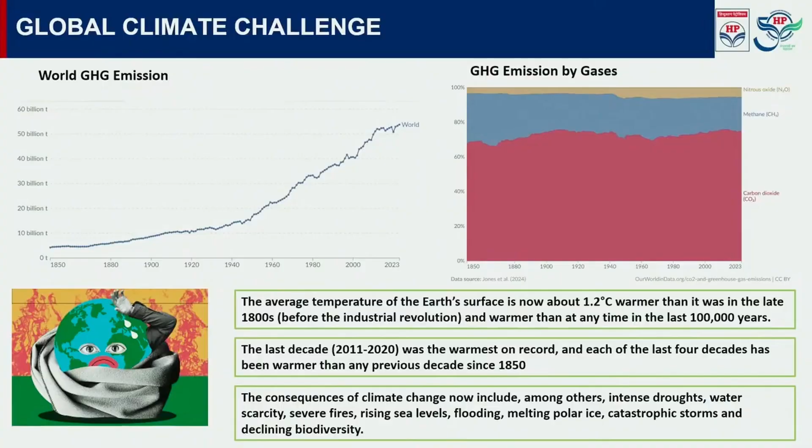The current path is telling us we may reach 4 degrees in the next 3-4 decades, which is going to wipe off the GDP of the world by 30%. And we will be seeing 10 months of drought, and the balance 2 months are going to be floods. This is what we are going to see, and in some parts of the world we are already seeing it. Next slide, please.

Now, apart from the climate change and the gases I told you about, which are going to trap the heat, there are several planetary boundaries which we are supposed to honor. There are 9 such boundaries listed here. One of them is climate change. Apart from climate change, we should also have biosphere integrity, stratospheric ozone depletion, atmospheric aerosol loading, ocean acidification, land system change, freshwater use, and so on and so forth.

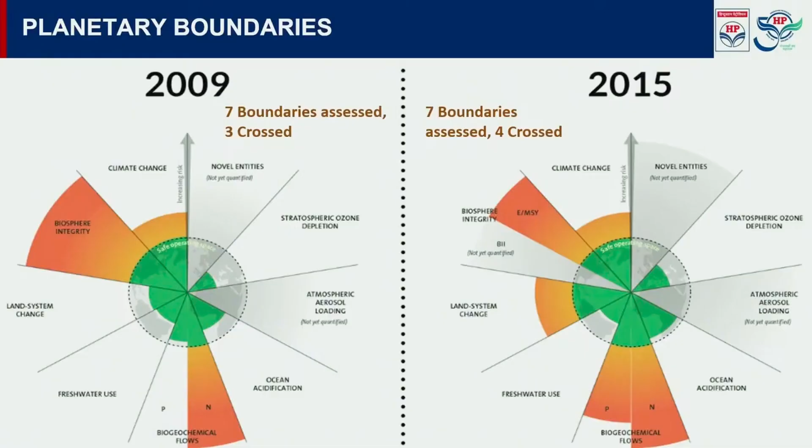In 2009, we had just violated about 3 of them. In 2015, we had violated more than 4. And in 2023, we have now crossed close to 6 boundaries out of 9. The predominant one being climate change, part of which is the CO2 concentration. Now, 1 or 2 I will just explain.

Biosphere integrity is the old species which are disappearing. Many of the plant and animal species, we know, are nearing extinction because of the ecological changes that are taking place. Water, we know, even cities like Mumbai or Delhi, during summer we have challenges of availability of water, which is affecting the entire society, and many others are there. We will not go into all these aspects, but we will see how this climate change is affecting us.

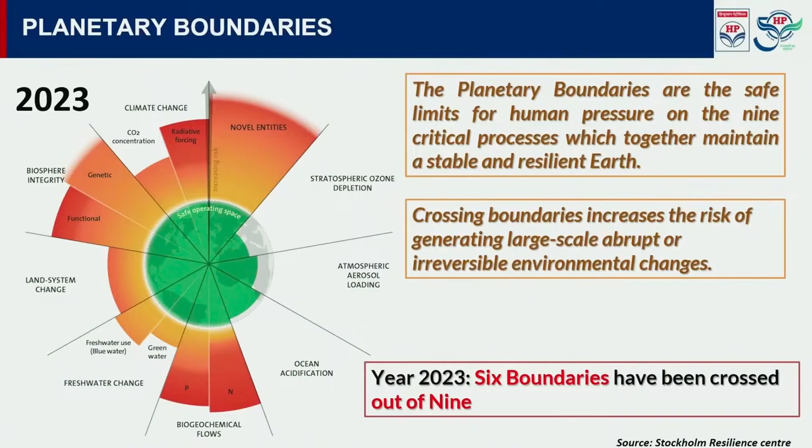The planetary boundaries are the safe limits for human pressure on the 9 critical processes, which are required to be maintained if we are to live as we are living today or as we lived a century back. Next, please.

Now come to the different terminologies or terms we have been seeing. The first is energy dilemma. Energy dilemma is what I will transition to. Should I go for renewable energy? Should I go for nuclear energy? Should we curtail our energy usage? Should we be increasing any other forms or continue with fossil energy and invent means of reducing the pollution? So there are a lot of solutions we think about. But one thing that is clear is we have still not found out exactly what is to be done.

There are many areas which have progressed, but they are not all going to take us to the goals we have. So that is what is called the energy dilemma. We have a dilemma today on what is to be done. But if somebody is going to solve this dilemma for this world, for humanity, there is only one group of people who will be capable of doing it. I will tell that towards the end. Even if I miss, please ask me during the question session. So who are the people who are capable of solving this energy dilemma?

Next comes the term energy trilemma, which is: I cannot completely switch over only to net zero energy, but it should also be affordable. It should be affordable to the weakest parts of society. It should be secure; I should get it throughout the year. If I'm going to import a particular energy and some geopolitical situation happens, then you may not get it throughout the year. So the next aspect is security, and it has to be sustainable. Whatever we do, it should be sustainable. That was the term coined about 5 years back, that energy trilemma is important and not just energy transition.

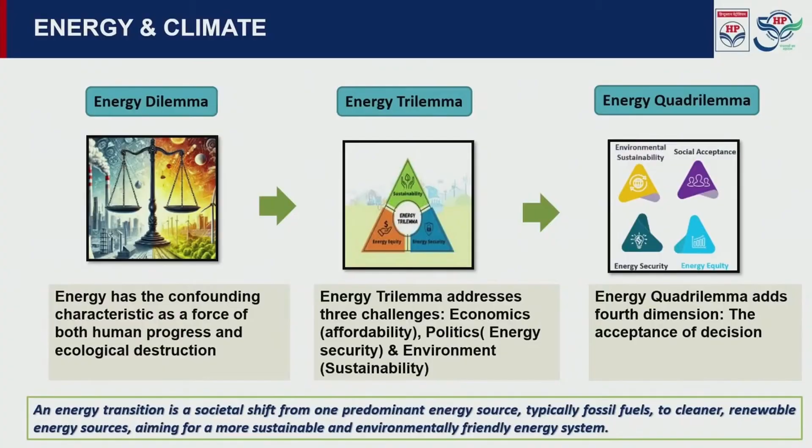So we have a duty. We will have to explain the exact impact of what we are doing, or the benefits of whatever solutions we are doing, then it will be accepted in society. So the quadrilemma takes care of the three dimensions of the energy transition, plus the fourth dimension, social acceptance. These are only some of the terms which many of us keep talking about, but in the coming future, more such dimensions may also get added. Next, please.

Is it possible or not possible? That is the question we will address. Actually, it appears it is possible, though the rate is very, very low. In our own country, if somebody 10, 15 years back had thought about solar energy penetration, they would not have thought that by 2025 we could have achieved this much development. Today, more than 27% of the peak energy is being supplied by solar and wind, which was not thought of about 12 years back. That means this is possible.

Electric vehicles, we have been hearing about them from the early 2000s onwards. In the first decade, it grew very slowly. In the second decade, we thought it would grow very fast, but it didn't happen. But in the current decade, it's really penetrating a lot. In some countries like Norway, new fossil fuel vehicle growth is very, very low. More than 90% of the new vehicles sold are electric. That means in some parts of the world, the transition is already taking place. It will gradually shift to our countries also.

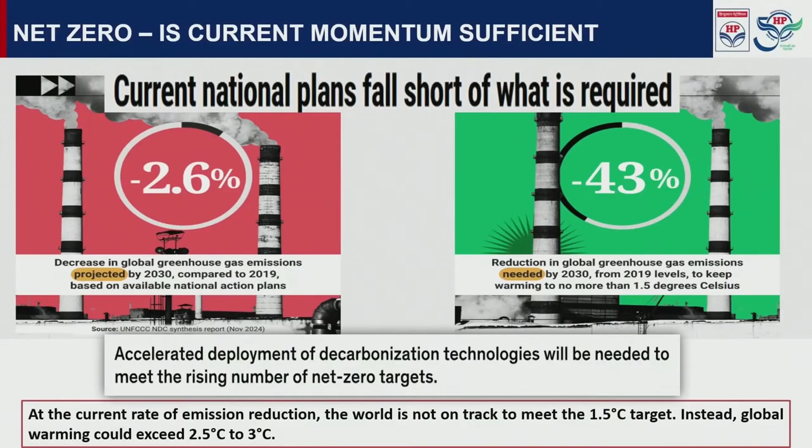Now, if we have to keep the temperature rise at only 1.5 degrees, which was our target to maintain the same climatic conditions in the world, we have achieved only 2.6% of what is supposed to be done. We have reduced CO2 by just 2.6% in the last 5 or 6 years, whereas the requirement is to reduce by 43% by 2030 to restrict the temperature rise. So this is the challenge and reality. At this rate, the temperature rise is definitely going to be more than 3 degrees in the coming 3-4 decades.

Now, what are the key strategies we have identified as an industry? This may not be the only solution, but these are the things we are doing. On some there is very good development and penetration, but in some areas we are not able to do much. The first one is renewable feedstocks and renewable energy, which we have already seen in the previous slides.

India is today blending 20% ethanol in the petrol we use. That means 20% of the fuel we use is already renewable, coming from a biogenic source. Similarly, biodiesel is about 3-4%, biogas less than 1%, but in the coming days this will increase. Even aviation will introduce sustainable aviation fuel, which comes from biosources. So there are some good developments that are reducing our carbon footprint.

The next thing all of us have planned is green hydrogen. Hydrogen is the cleanest molecule you will ever see, because when it burns, it gives only H2O. So it is a no-brainer, and it's been known for centuries. Then why has it not grown as the alternate fuel?

It's not easy to make hydrogen so simple. I mean, you can say in an easy way you will do, but it is not that easy. That's why it has not grown as it otherwise would have. Because even in the 1960s, hydrogen-powered vehicles were already invented and ran in some countries, but it did not grow because of the cost factor.

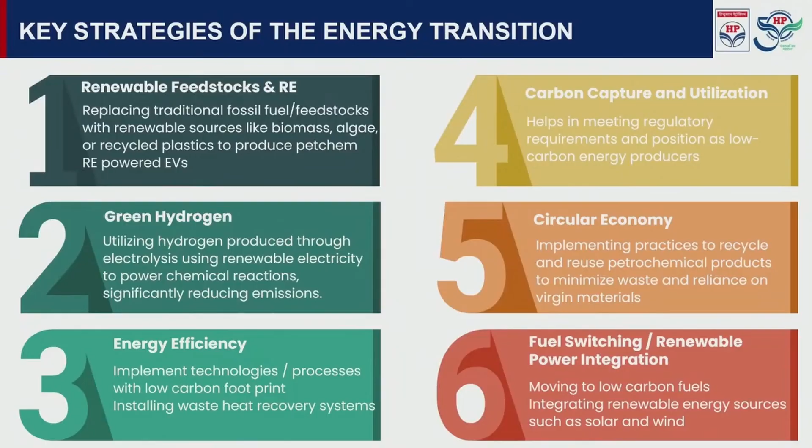Just a small diversion, many of you will know this, you would have read some books or during the initial classes, people would have covered this. One of the fascinating facts of chemical engineering is that today all of us are able to eat food, in spite of India's population multiplying several fold from the day we got independence till today. The population has grown by almost 4 times. But for all 4 times the people, we are able to give them food. So how are we able to give it? Simply because synthetic fertilizers have been used.

The fertilizer industry has actually led the green revolution, and all of us are able to get food without any problem just because of fertilizers. And fertilizers have come because of the Haber-Bosch process, which is the conversion of nitrogen and hydrogen into ammonia, and then we convert it into urea and make all sorts of fertilizers from that. If the crop or whatever agricultural produce is able to do this, it's only because of the chemical engineering process, which is the Haber process.

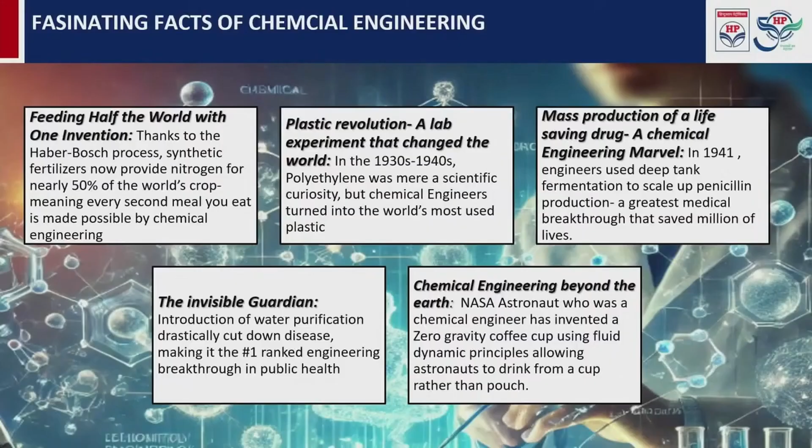Now the next is the plastic revolution. In a lab, normally we do several research; with a number of materials people will keep on identifying, developing. So polyethylene was one such material, identified a century back. But today polyethylene is one of the most important plastic materials, without which the standard of living you have reached would not have come. It is there in each and every part of life today, which has made many materials accessible and affordable, and this again has come from chemical engineers like us.

The next most important is life-saving drugs. Today the life expectancy has gone to more than 70 years from the low 50s several decades before because of the advancements made in the pharmaceutical industry. And in all these pharmaceutical industries, chemical engineers have developed processes, materials, solutions for overcoming many of the pandemics that were existing in our world.

One more important one, like food, is water purification. Water is another key resource for us. And as the population grew, water became scarce. But because of water purification technologies, we are able to give water to the entire society even now. There are problems in pockets, but as more and more breakthroughs come, in a more affordable way, we will be able to give water for all our requirements.

One more invention is about the astronauts. We have heard about the use of pencils in spacecraft. You even have ball pens which will flow in spacecraft, and so on and so forth. All have come through innovative ideas of chemical engineers like us. Next, please. Some of these facts you would have known.

Now, just touching on the history of chemical engineering. Ever since the Bronze Age or the Metal Age started, chemical engineering has been there. We have been purifying, we have been converting into various forms. Then for perfume extraction, chemical engineering principles were used. These are all 3,000, 4,000 years back. Definitely there were no colleges or chemical engineering curriculum at that time.

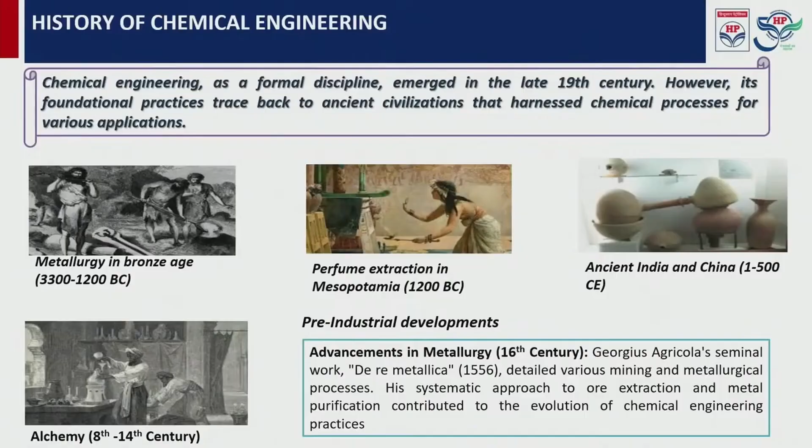And another most notable item which people were always talking about 2,000 years back: many people claimed they would convert lead into gold, which is alchemy. But these were all sincere attempts made to make changes to the molecules. Next, please.

Now, the organized chemical engineering field, the industry we have, how did it come? It started in the UK; most of the developments were taking place in Northern or Western European countries. When the glass industry was growing, there was a need for soda ash. So from batch processes, they went to a 24/7/365 industry. The first such industry was the soda ash industry. Then it moved into the textile industry, where chemical engineers started producing the dyes required for textiles.

A number of other similar processes gained traction towards the end of the 19th century. The first recorded academic progress, a series of lectures at the Manchester Institute of Technology, was documented, and the first curriculum started sometime in 1887. In 1888, the first chemical engineering curriculum at MIT in the US was started. So this is a brief history, and subsequently with the advent of the horseless carriage, the transport vehicles, fuels came into being, which we are all using till today. Next, please.

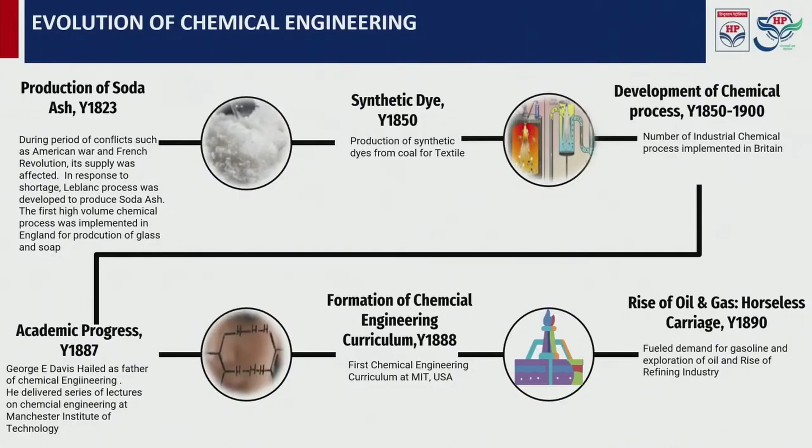Similar information, I have just put it in a different bucket. From 1930 to 1960, when the World War came, there was a requirement for a lot of new materials. Chemical engineers stepped into each and every requirement and solved the problems of World War II. Today we have high octane gasoline; the gasoline we buy from petrol pumps has an octane number of 91. When World War II broke out, there was a requirement of high octane gasoline for running planes, and the country which could make huge quantities of it actually won the war.

So that is the importance of chemical engineering, not only in lab scale development, but in industrial scale production also. The petrochemical industry we have already seen. Advancement in unit operations has actually helped us improve the efficiency of production and bring down the cost of production.

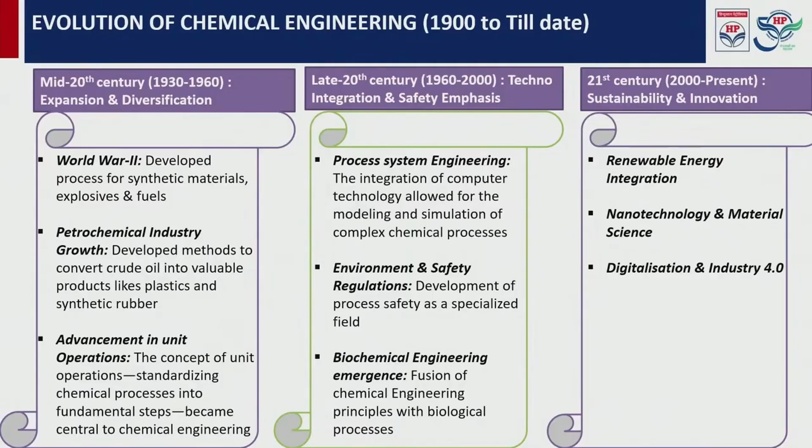From 1960 to 2000, the advent of computers came, so process control came into the picture, and efficiency went even higher and manual intervention reduced. Today, the chemical industry is a place where you will see fewer personnel in the process plants because of the advent of computers and process control.

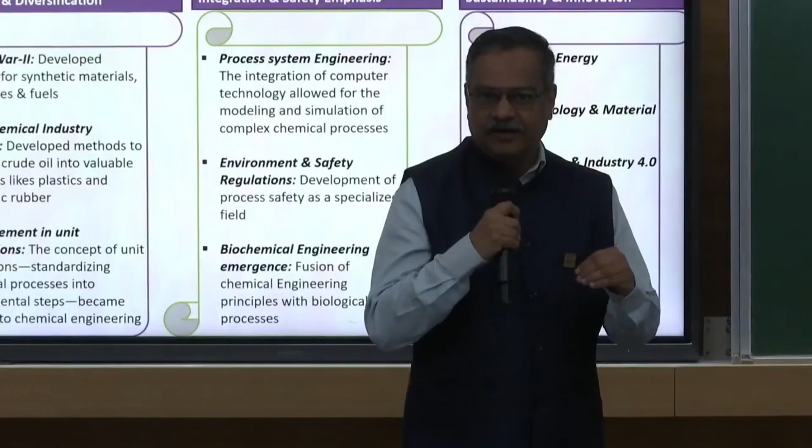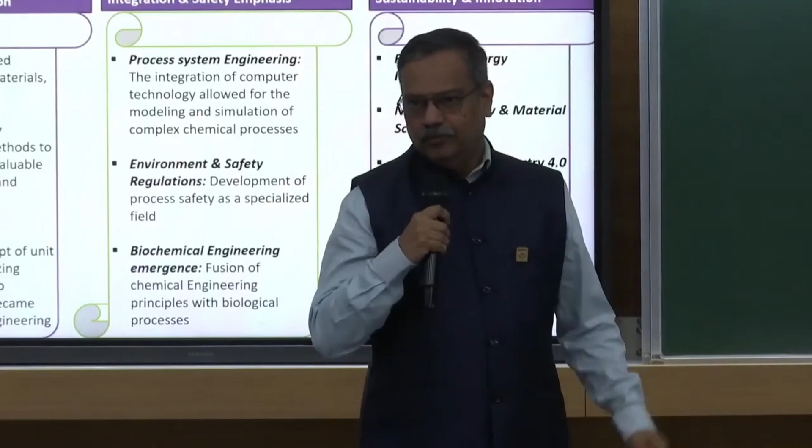But at the same time, environmental regulations also came. See, when development takes place, there is a negative thing also happening, because some way or other there is some emission into our environment. So we have to grow in a responsible way. So the rules and regulations started coming when all this got accelerated.

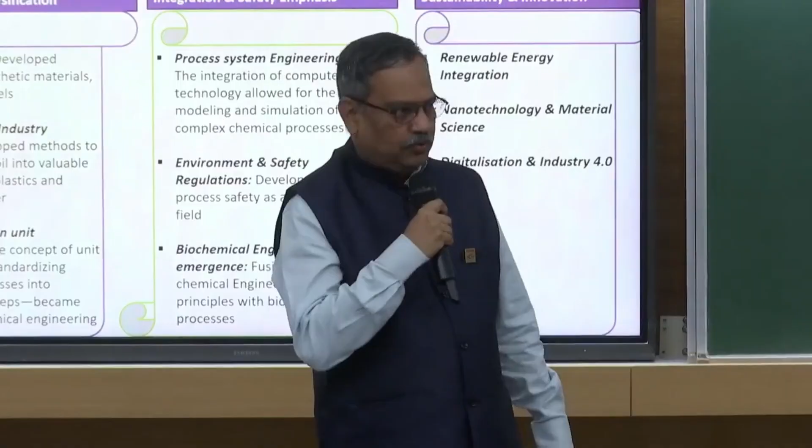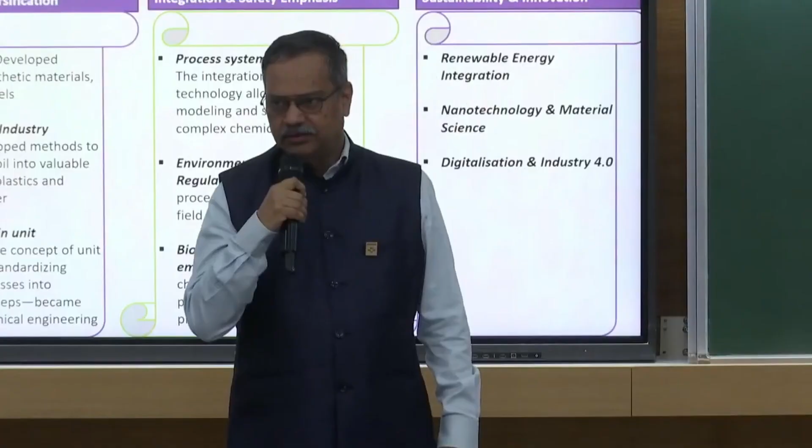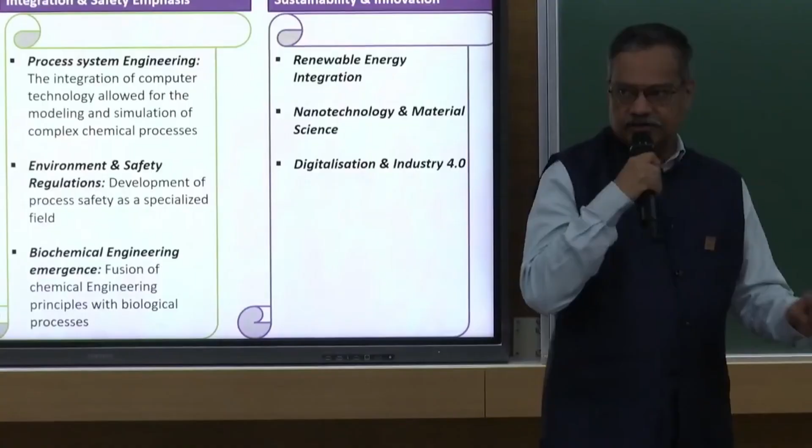Biochemical engineering was another area which gained prominence about four decades back, and it is still one of the most sought-after, most promising areas where more developments will take place. In the last 20 years, as we saw, renewable energy integration is taking place. Nanotechnology and material science: we are not satisfied only with the new petrochemicals or the new metals we saw. We now require more and more new materials.

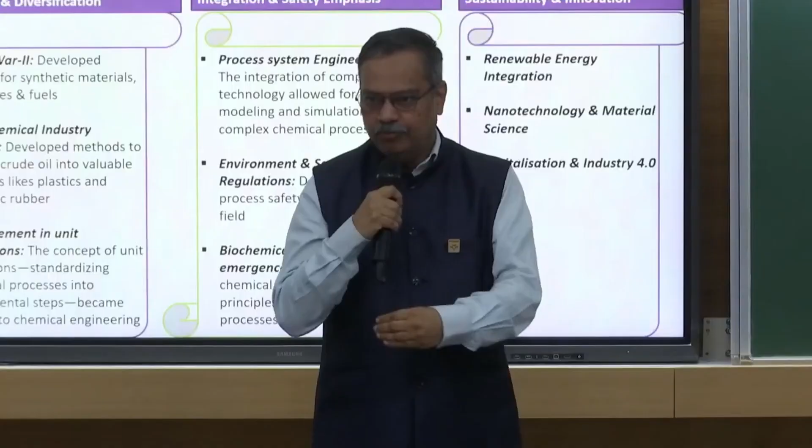Suppose I told you about hydrogen. If you want to make hydrogen at a lower cost and at the same time not be import dependent, then you will have to bring new materials into the picture. Digitalization and Industry 4.0 are again going to take us to the next levels.

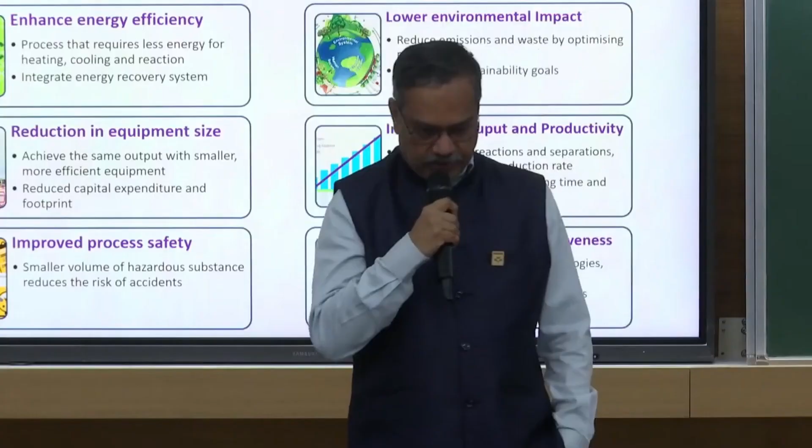Now we will see some more areas where chemical engineering principles need to be applied, which will help us in the energy transition. Energy efficiency we already saw, but processes that require less energy for heating and cooling. Any chemical process involves heating, making a reaction or a physical separation, and then you have to cool back. So it is an energy intensive industry. If we can integrate energy recovery systems and reduce energy, that will help, and as chemical engineers we will have to find a lot of new innovative methods to achieve the same.

Reducing the equipment size. We are looking at miniaturization, process intensification, the land footprint, the carbon footprint. Each and every item has to be at a smaller size. So reduction in equipment size is another important area, which is called process intensification.

Again, we handle flammable liquids, very dangerous materials. So whatever we do has to be done safely. So industrial safety is another area where growth is required, and newer concepts will keep evolving. Lower environmental impact, as I said, and increased throughput and productivity with a given amount of raw material is one more area, and process innovation.

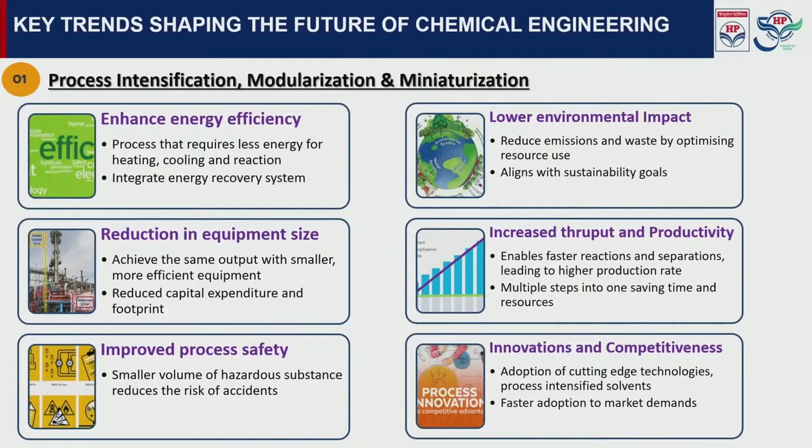I may not have mentioned something. Tomorrow's new inventions are not known today. That is called a technological breakthrough. You may not be able to tell what solution is coming. If some of you can bring it out, that becomes the breakthrough technology, like electricity. When the electric bulb was invented, the previous day nobody knew such a thing existed. So when such a thing comes, it is really a breakthrough. This is what is required, rather than the incremental improvements some of us are doing today. Next, please.

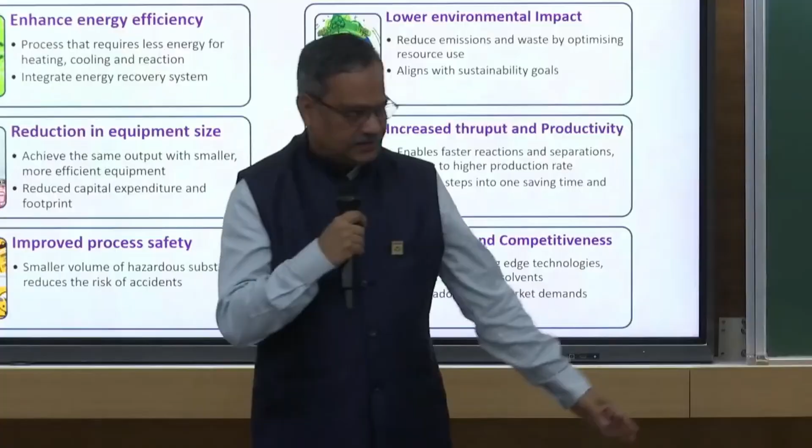Now molecular modeling and simulation. I was mentioning you will have to go to the molecular level of valorization. I cannot do thousands of experiments to come to a solution, so you must be able to do the same thing through molecular modeling and simulation. And in a refinery like ours, we process raw material from almost 20 to 30 different sources.

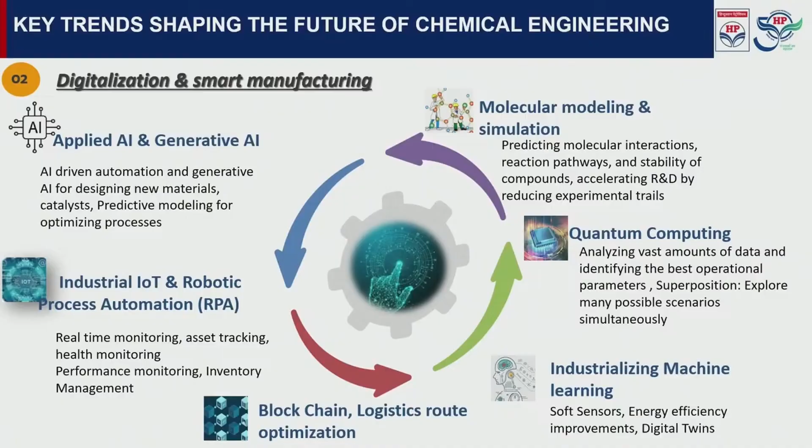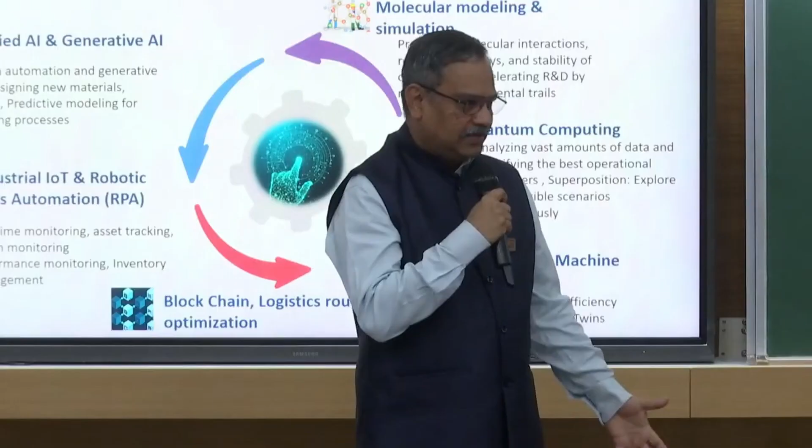Crude can come from across the globe, anywhere, and each type of crude will have a different set of properties. Now if you have to seamlessly process that, you should be able to predict what will happen when a particular crude enters the process plant. That is where process simulation helps us in real-time optimization.

Quantum computing helps us achieve the speed we could not reach earlier. Now by applying quantum computing principles, we will be able to do it, and industrial machine learning also, right? So now what are the sustainable green technologies? We talked about green hydrogen, green power, recycling, carbon capture. Some of the items highlighted in red I will touch upon now.

E-fuel is a synthetic fuel, made by absorbing CO2 and using renewable hydrogen to make a fuel out of it. We feel that in the coming years, if we can make it in an affordable way, then with the existing infrastructure, without changing any of the supply chain, with the existing retail outlets and petrol pumps, you will be able to achieve energy transition. So e-fuels are touted to be the future, but today they are definitely not economical.

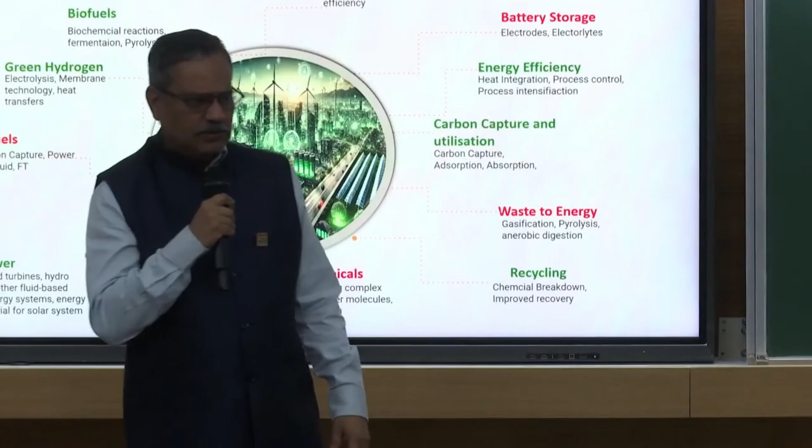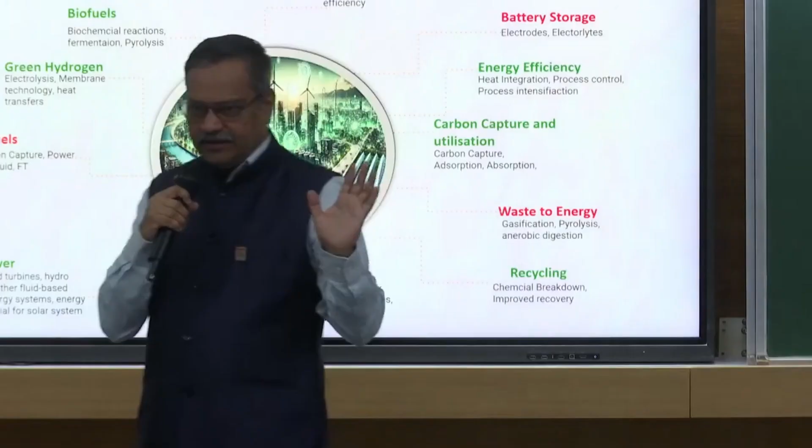One more field where as chemical engineers we can contribute is catalysis. Several years back, India started the journey of removing pollutants from fuel. We started with Bharat Stage 2, where sulfur in diesel was reduced to 2000 ppm. We used to have almost 10,000 plus ppm of sulfur, which was reduced to 2000. 2000 we brought to 500, 500 to 50, and today we are at 8 ppm sulfur in diesel. That means we have removed practically the entire contaminants in the fuel. Sulfur dioxide emissions have drastically reduced because of this advancement.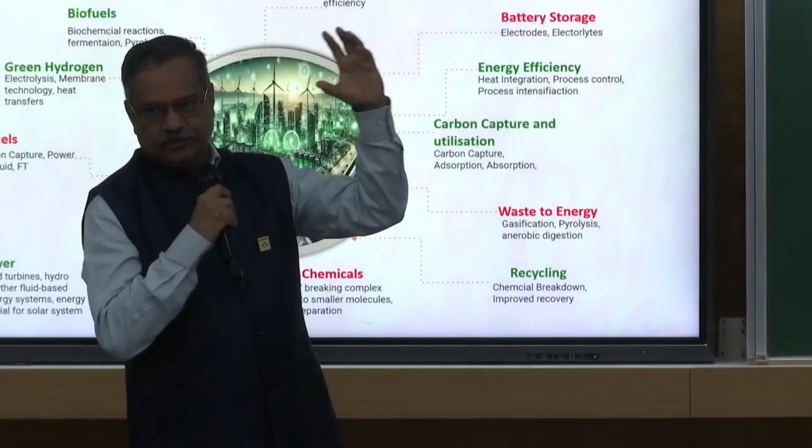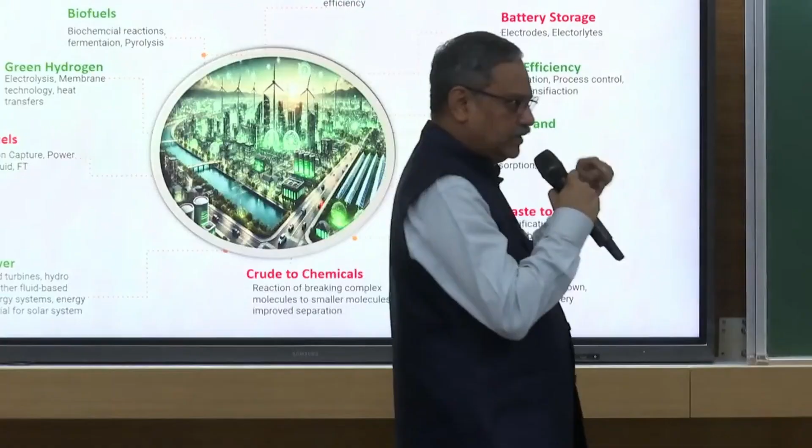Now, how would you have done it? It is easier to remove when the sulfur is high, say from 10,000 ppm to 2000 ppm. When you go from 2000 to 500, it becomes severe. From 500 onwards, when you want to remove the refractory sulfur species, it's very, very difficult. It's energy intensive and requires large volumes of catalyst. But we are able to do it without any problem in India. The entire country is producing less than 10 ppm diesel and MS.

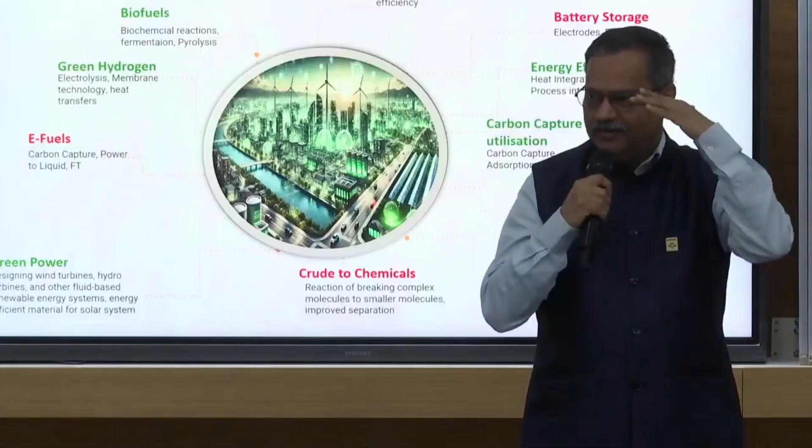Now, how was this made possible? In the same reactor, just by advances made in catalysis, we are able to do it. In the catalyst, we were looking into the pores, putting the active sites inside the pores, and doing structured stacking of the active sites, all taking place at the atomic level. That is the growth catalysis has brought us today, and we hope it will keep growing. Every time we think catalysis has reached maturity, a new invention takes place which further reduces either the energy or the size of the reactor.

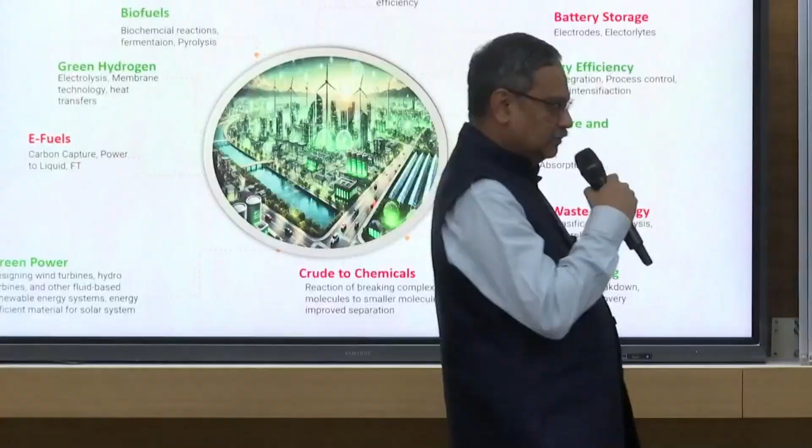So catalysis is one area, energy storage is another. Renewable energy has a problem of variation. Wind is not available throughout the day, sun is not available throughout the day. It is seasonal; in the rainy season, you may not get these two. So what is to be done? That is where energy storage is required. If you want to supply only renewable energy throughout the year, energy storage is very, very critical.

Today, though renewable energy has grown, in periods like summer, India's demand last year crossed 220 gigawatts. Where is it suddenly going to come from? At night when the sun goes down, the entire 220 gigawatts has to come from fossil fuel. That is the problem today. In spite of advancements in renewable energy, at peak demand it is fossil fuel stepping in to satisfy our needs. So to overcome that obstacle, energy storage is required.

Now energy storage is again a costlier solution for us. We know battery prices are coming down, but more novel concepts are required. Some talk about pumped storage, some about compressed air and then taking the energy later, and so on and so forth.

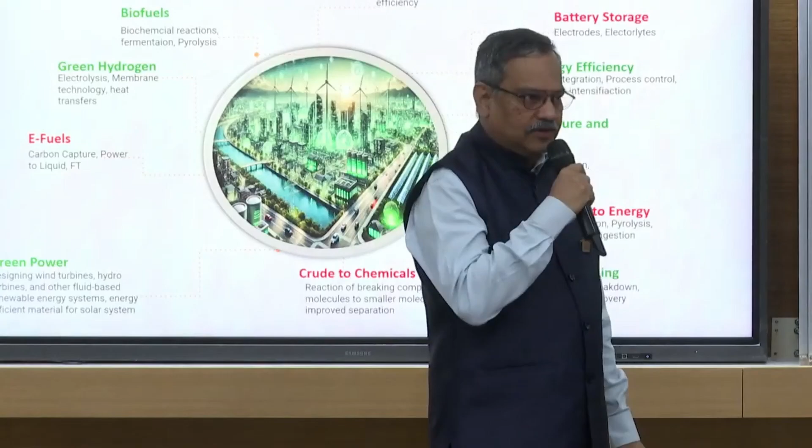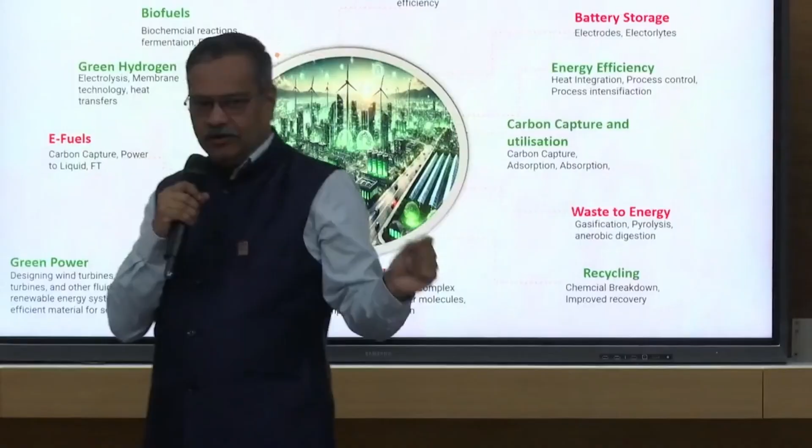One more is crude to chemicals. We saw a lot of advanced materials have come, like polyethylene and polypropylene. They all require more than 10 to 15 processes to make. What if I can just take the raw material, crude, and in a single step convert it into ethylene and propylene? That is crude to chemicals, a single step process, on which very good work has been done. From HPCL's side also, we are putting up a demo plant in one of our refineries to achieve this single step conversion into chemicals. Next, please.

In future, we feel, as I already mentioned about material and nanotechnology, biocompatible polymers, these are the areas where more research, development, deployment are required. Energy storage we have seen, so we'll go to the next.

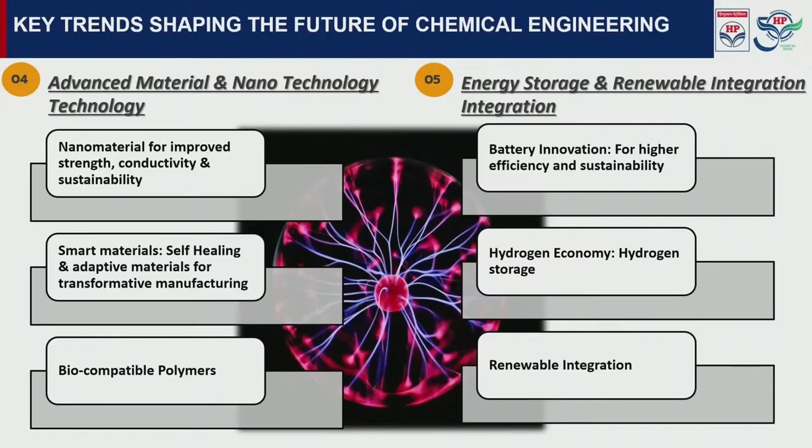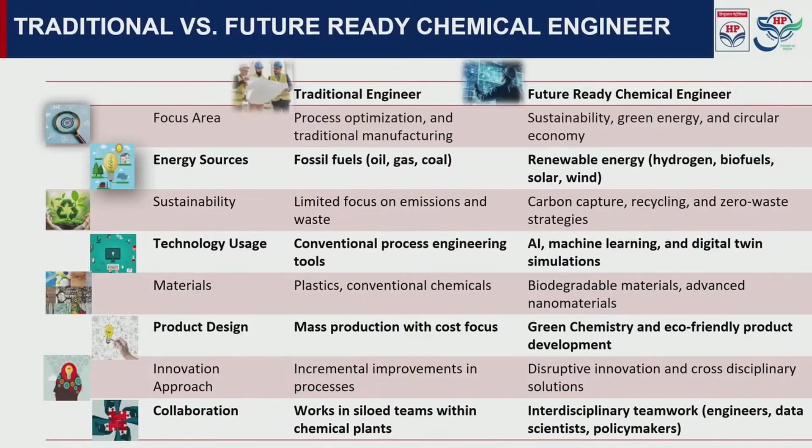I can also add to this by telling that, see, many of you are attentive in any class. The front benches are normally very attentive and they'll be taking notes. But as you go back, the backbenchers will be there who will do what they feel like. And maybe they are also right. In their own world, they may be thinking something, maybe new ideas are coming. But in the traditional versus conventional, what we see is more and more backbenchers are now growing. That is another kind of challenge which probably the college should be handling.

Okay. Now the similar solutions what I had written for chemical engineers: product innovation, process innovation, and the ecosystem. Whatever we do, I have been repeating, it has to be done without impacting the environment. So these are the ones which are required. Innovations are required in products. Innovations are required in process. That means new molecules, new combinations we are looking at. The way we do it, we are looking at new processes. As I told, single step conversion of crude to chemicals. And whatever we do should be sustainable. So these three show the scope for innovation for chemical engineers.

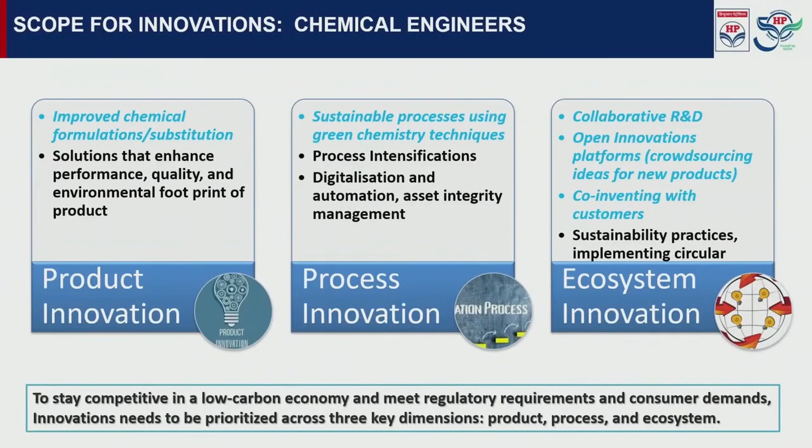Next, please. Now, this is what I had just covered about energy transition. All of us know climate change is very important. We'll have to focus our areas to grow on this sustainability. Then I touched on a few things about how chemical engineers are helping in achieving this energy transition. Before I end, I will cover something about what HPCL is doing for this innovation.

So as I told, we have the youngest oil and gas research center in Bengaluru. Within these 10 years, our patent portfolio has crossed 650 and more than 10%, 10 to 20% of these patents have been commercialized already. So it's not only for doing's sake, but it's all done with a purpose. There are several areas. The current thrust areas for us are indigenization of catalyst chemicals, process intensification, biofuels, petrochemicals, and alternate forms of energy. These are the current research areas. There are more than 21 labs

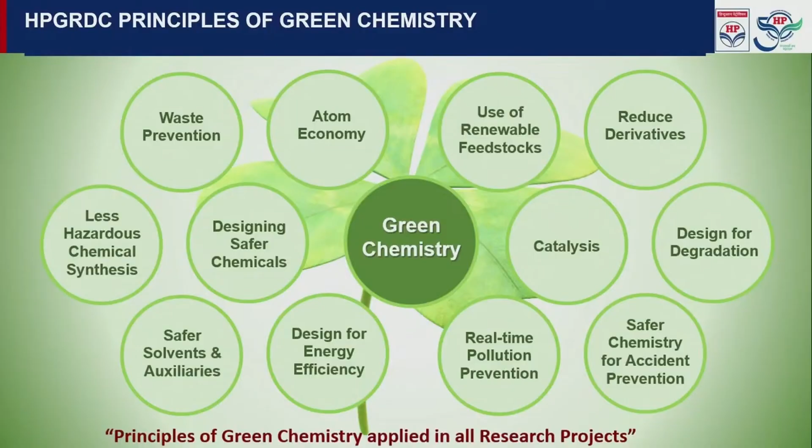within that campus. The basic principle we use is we apply the principles of green chemistry in each and every project, each and every activity that is being done. It starts from waste prevention, use of safer materials, safer chemistry, and real-time pollution prevention. So there are 12 principles of green chemistry. There are books written on that. You can go through that and see how each one is applicable and how each one of them is very critical for future growth. So this is being applied in all our research activities.

By these applications and by the facilities that have been created, some of them have already been brought to the commercial scale. So a few of them are listed here. One is the HP COAT, which is crude to olefins and aromatics technology. I have already touched upon this. The second one is blue hydrogen. Now CO2, I told you, we'll have to remove in a cost-effective way.

So that attempt towards doing this is HP BH2, where a 20-meter column, you would have learned about distillation columns, where 20-meter, 30-meter tall columns are used, is being replaced by a 1-meter diameter rotating packed bed. That means the mass transfer which was taking place in a long column of 20 meters can now be compressed, and the same mass transfer will take place in a 1-meter rotating packed bed. The mass transfer forces now come from the rotating motion of the bed. So for one such attempt we are setting up a demo plant. Already there is a pilot running in our R&D center successfully.

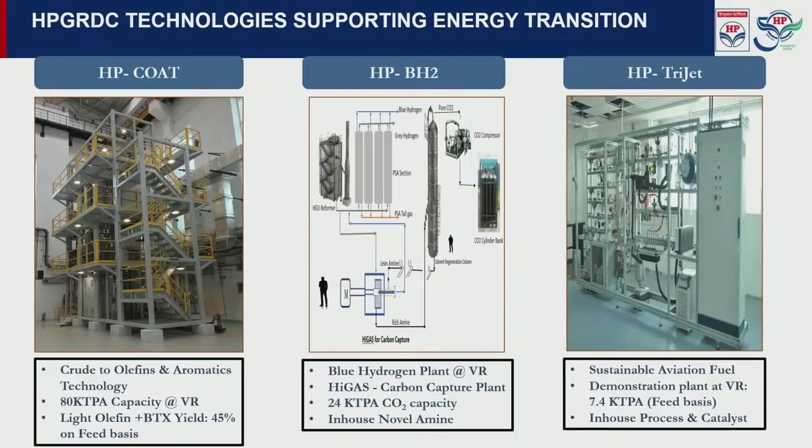The next one is another indigenous technology, which is TriJet. TriJet is triglycerides to jet fuel, which is nothing but conversion of vegetable oil or used cooking oil into sustainable aviation fuel. There is one demo plant coming up in one of our refineries also. HP ASAP is acid assisted single step conversion for the production of ethanol. There is a pilot running, and we are planning to put up a demo based on this. This converts waste agricultural product, such as rice straw, wheat straw or bagasse coming from sugarcane, into a fuel.

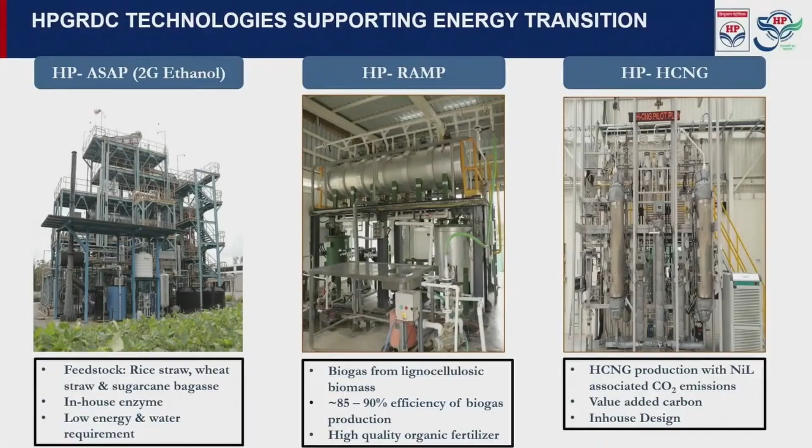HCNG is another form of alternate fuel where hydrogen is mixed with compressed natural gas. There are various ways of doing it. I can simply produce hydrogen separately and mix it with compressed natural gas. But the effort we are making is: you take the same natural gas and pass it through a reactor where partial pyrolysis takes place. The partial pyrolysis converts part of the natural gas into hydrogen by rejecting carbon nanotubes. Carbon nanotubes bring value. If we can add value to that, this entire alternate fuel becomes a value-added solution for us, and it will be sustainable. There is a pilot running for that, and demo plants are being set up.

Several other green technologies I can keep on talking about. I have covered most of them, but we can talk about the new electrolyzers. The solid oxide electrolyzer is the most energy efficient electrolyzer, which will take the power consumption close to the thermodynamic limit. So that is being made, and there are several other process intensification and cost reduction measures being done.

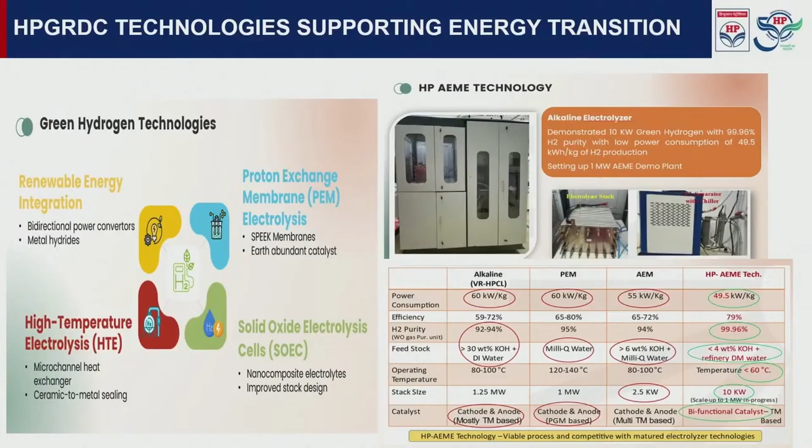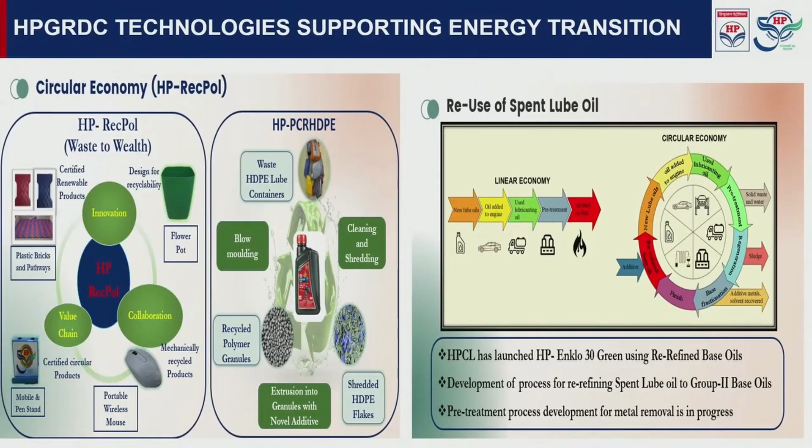We'll have some more time for questions, so I'll rush through and close this. Circular economy is one. Spent lube oil can be reused. There are several chemicals which can go for energy efficiency improvement. You may synthesize a new molecule, or you can develop a new formulation. By formulating different things, you will be able to achieve energy efficiencies and overcome a lot of the process problems all of us see in the industry. These are some examples which are all commercially used in our refineries.

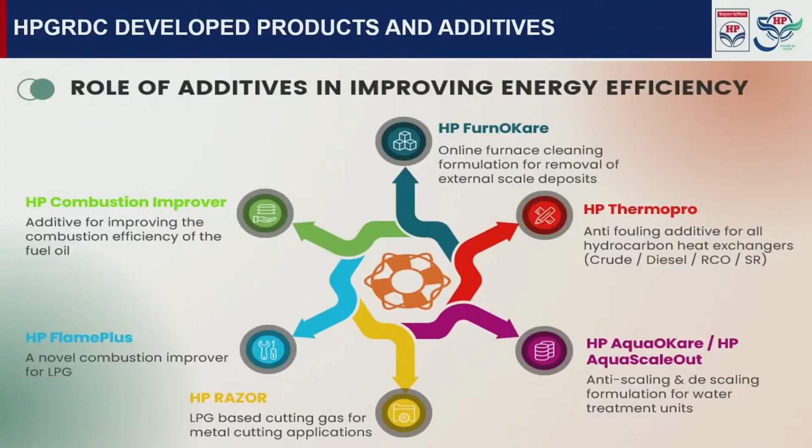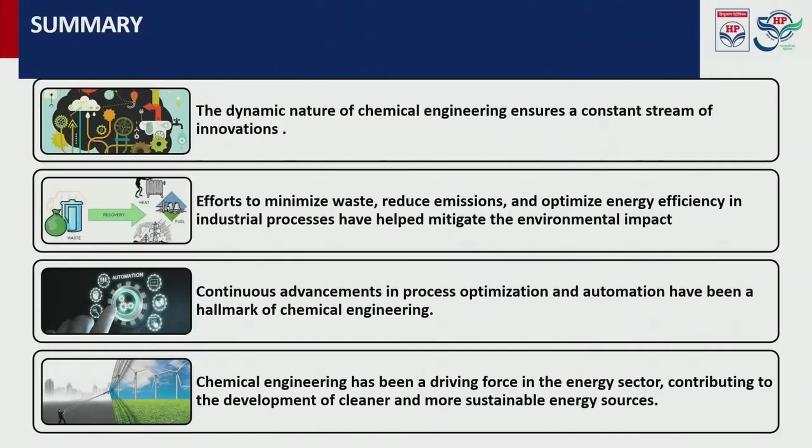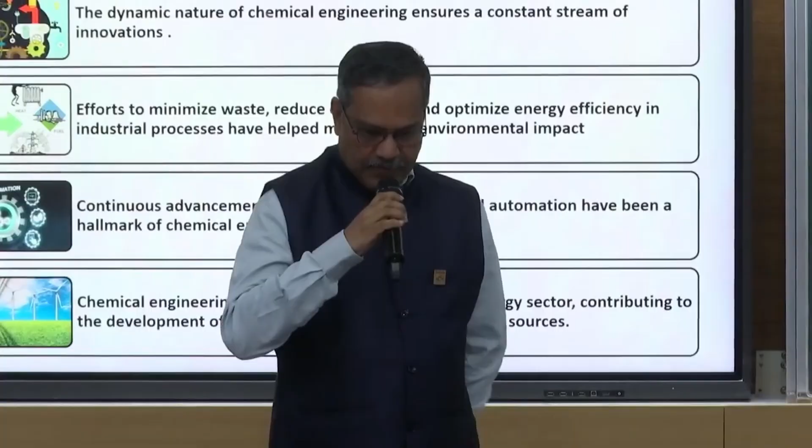So to summarize, the dynamic nature of chemical engineering ensures a constant stream of innovation. I told you in the beginning about the energy dilemma. Who in the world will be able to solve the dilemma of how the energy transition should take place, and how we will make solutions for that? If there is one group of people who can do it, it's chemical engineers. So believe me, the solutions are there in chemical engineering if somebody is talking about energy transition. Other things we have seen, so we will not repeat, like waste minimization, reducing emissions, continuous advancements in process automation and optimization. In each and every aspect of the energy sector, chemical engineering is the backbone.

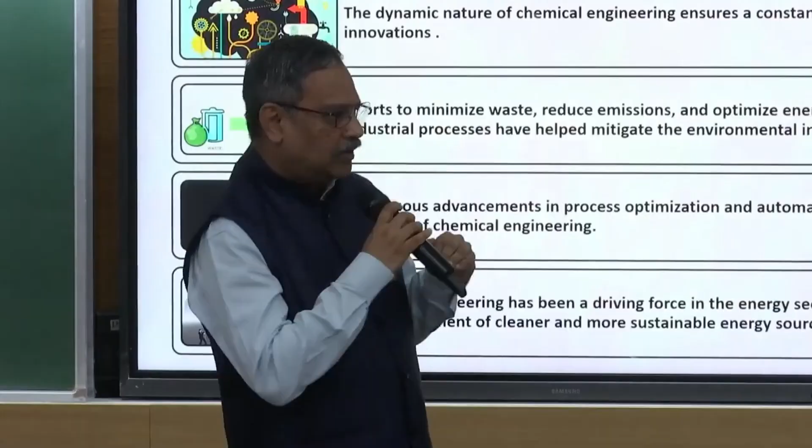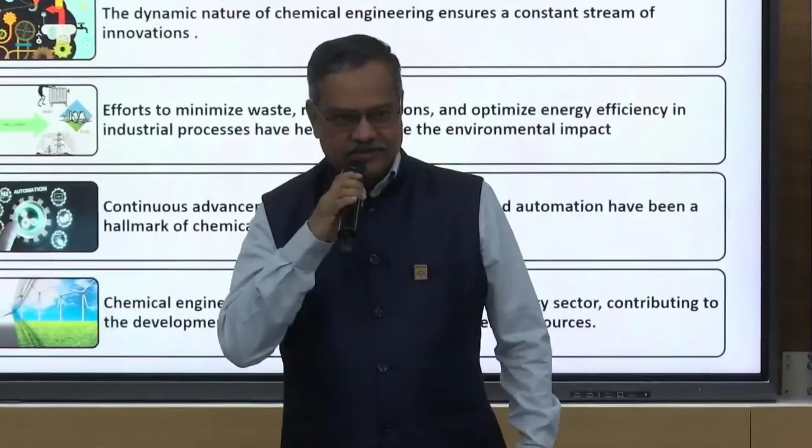So to repeat what I told, to achieve energy transition, to overcome the energy dilemma, and to achieve the energy quadrilemma, chemical engineering is used in all spheres of these areas. Hope some of you will be part of us in the coming days in achieving this objective. Many of you will be working in these areas across the globe in some form or other, working towards achieving this goal.

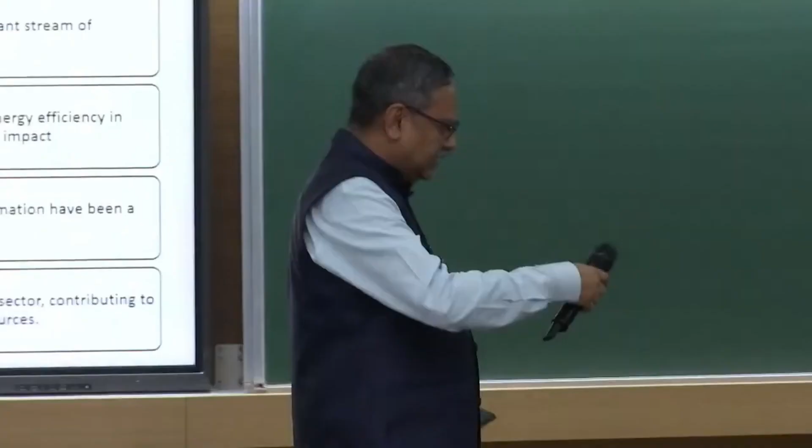What do you see as the potential of hydrogen carriers, like in the form of some materials? So we talked about energy storage. I told you because of the variations in renewable energy, unless you have a storage solution, you will not be able to either use it throughout the day, or you will not be able to move it from a place where it is available to a place where it is required. One example is hydrogen. Hydrogen cannot be transported over large distances in an economic way. Different solutions are required.

Australia has huge portions of land where I can make solar power. I can convert it into hydrogen. But who is going to use hydrogen in Australia? It has to come to Asia. But how will it come? That is the question mark. So his question was about the carrier for hydrogen. There are many carriers for hydrogen. Again, chemical engineering has answers for all. Ammonia is a carrier. Liquid organic hydrogen carriers are there. So there are many solutions. But like any other energy storage solution, this is still not economical. So our duty is to see how we make it economical.

Then somebody came out with another idea also. You are trying to make a chemical molecule and then trying to move it. What if I make an electron and move the electron first, and use that electron to make the chemical molecule? So here electrical engineering should also collaborate. If I can lay a cable from Australia to India, power can come here in an economic way, and then we can convert it at the point of requirement. I think these are the exciting things which have to come in the future.